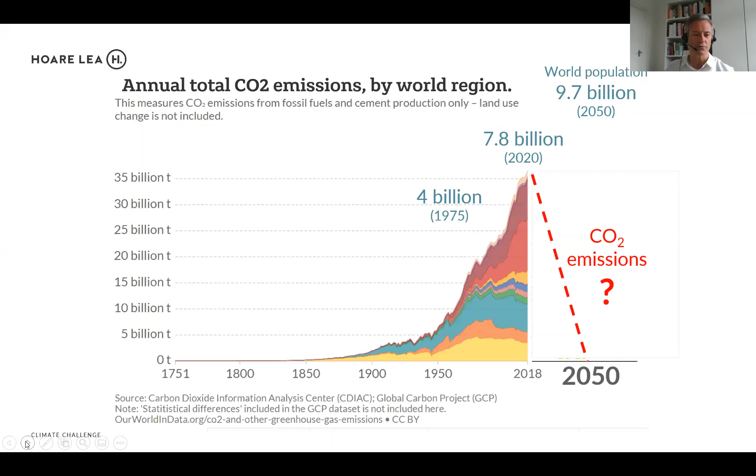There's a big market failure with climate change because the impacts of climate change are not faced by those responsible for the activity, partly because the impacts are faced elsewhere, and because they will be an impact in the future. A big economic study commissioned by the British government several years ago said that the cost of inaction will be overwhelming.

So as engineers, as designers, we need to demonstrate leadership, working with the whole project team, working with architects, working with clients to advocate a path to net zero, accelerating the shift to low energy buildings, sharing knowledge as Ian articulated. Definitely that sharing of knowledge is a key feature of achieving better outcomes. And a focus on performance outcomes. So it's making sure that what we design is delivered in practice.

So we have legislation as well. The UK was the first country to declare net zero territorial emissions. So that doesn't include imports, but how we operate as a country. Now that's 30 years off, and we clearly need to do something before that. And this is why there's a lot of effort on projects to get to net zero much quicker, at least in new development where we can, but also existing stock.

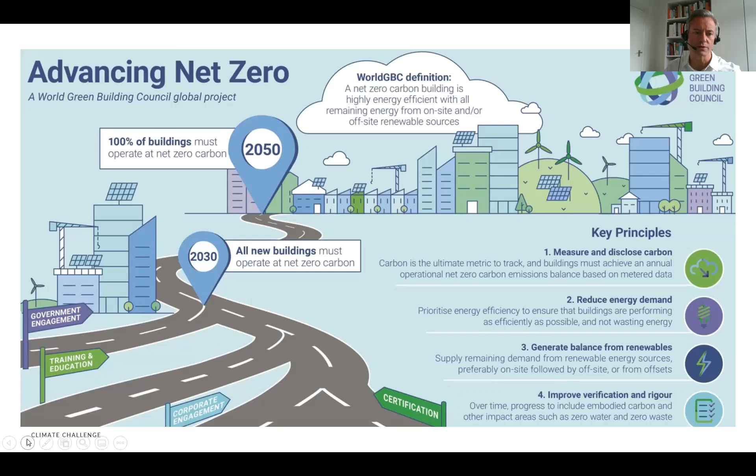And that's the new build focus, but also we need to deal with existing stock. So by decarbonising electricity generation, we can also improve how existing buildings perform and look at retrofit and refurbishment as well, which is a massive challenge, but an opportunity for the supply chain to get involved.

So it's always worth clarifying what we mean within the scope of net zero carbon. So the UK Green Building Council published a framework on this, and it defines operational carbon as the energy in use and the inclusion of any renewables, and the embodied carbon, which Ian spoke about, that's the pollution that comes from the construction process and replacement and refurbishment. And when you look at the whole of that, that's the whole life carbon.

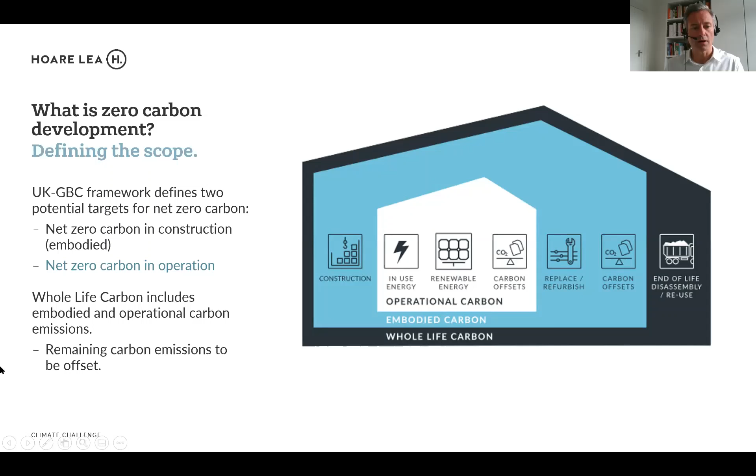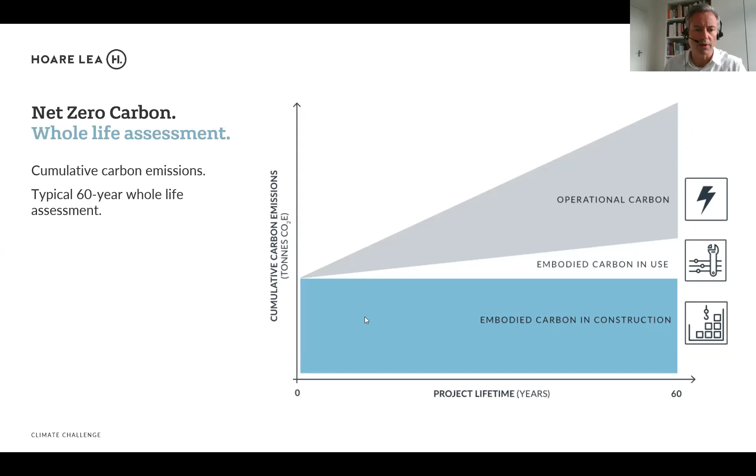So this is a typical analysis of building over 60 years. So approximately half of the whole life carbon starts from day one of occupation, because that's embodied in construction. So this will look different for different building types. It will look slightly different for schools, for homes, for a research building. But generally you get this pattern of the operational carbon increasing and the embodied carbon in use being replacement of parts. So we want to tackle all those elements.

And here's a breakdown of embodied carbon, showing on the left-hand side the substructure and the superstructure, really dominant there on embodied carbon, and that's largely as a result of concrete and steel in construction. And the more you can do to reuse a structure, obviously the more avoided carbon emissions there are, and then other components like the envelope and the building services themselves have an embodied carbon element.

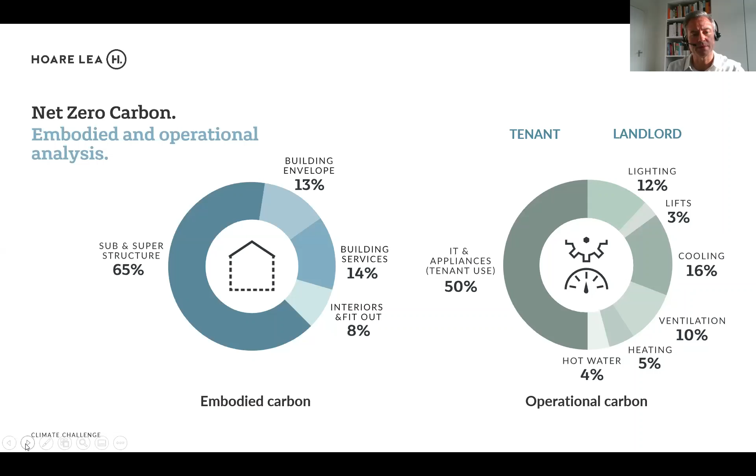And then on the right hand side, this is analysis for an office. So the tenant in an office is responsible for about half with IT and appliances, and then the landlord systems, such as the lighting and the ventilation systems, are also responsible for about half of operational carbon. So that provides an overview of all the things we've got to tackle to reduce carbon emissions in the built environment. At the same time, we have to deal with adapting to a different climate.

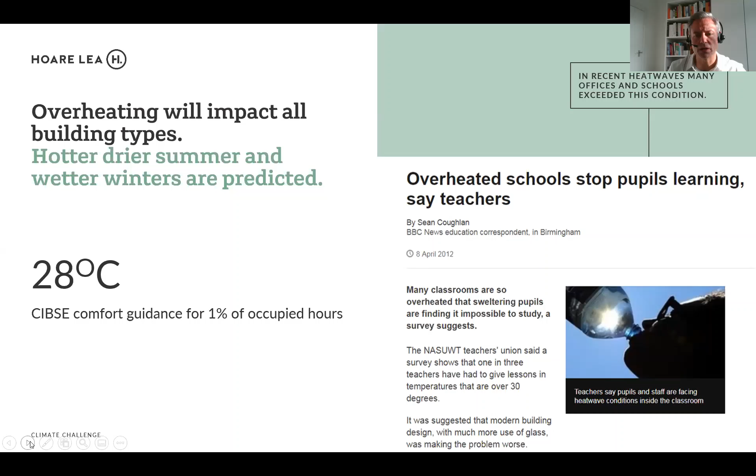So not only are we aiming to target more efficient buildings, we've got to deal with potential overheating, more flooding and design buildings to accept that. So a big challenge in building design is how do we design to avoid overheating and more heat waves without the need for air conditioning. So it would be a simple response to say put more air conditioning in, but that is an energy load. So we need to look at passive means, alternative means to achieve comfort, and we're seeing lots of implications in schools, for example, in apartments where there's just challenges for removing the heat gains.

Now, what about the commercial implications? So there's an estimate from the Committee on Climate Change that a net zero commitment could be met by an annual resource cost of 1 to 2% of GDP. This was announced before the current situations that internationally we're dealing with. I mean, for a comparison, that's less than what an industrial nation might spend on defence, blown out of proportion by what we're dealing now with COVID impacts on the economy. So in the scheme of things, 1 to 2% of GDP did seem like an affordable contribution to be net zero.

We find as consultants working with property developers and public bodies, it's really important to understand the business case. What drives the funder of a project to consider net zero, because many clients are not considering net zero. So we think it's important to demonstrate the co-benefits of getting to net zero and climate conscious design. So we often talk about the government drivers. So we've signed up to the Paris protocol to limit climate change. There will be regulation changes. The government's reviewing planning. So we talk to investors about being resilient, so that the investment in a property is future-proofed.

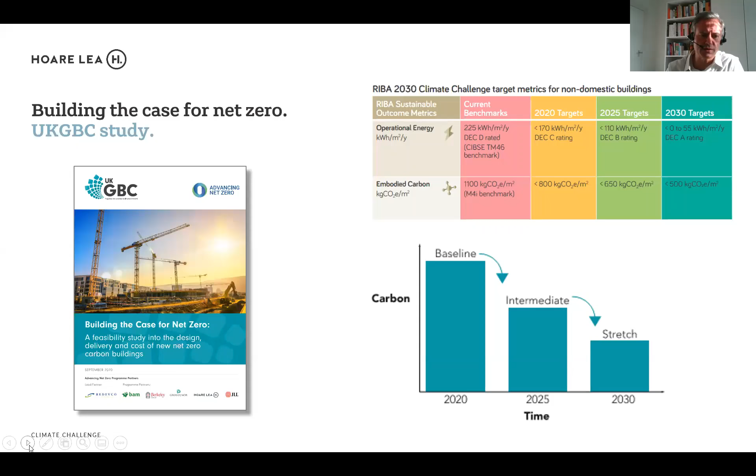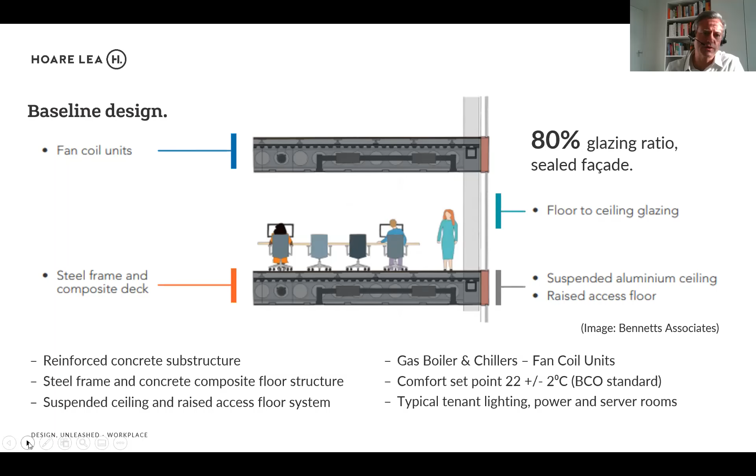If we go to the stretch target of this RIBA 2030 challenge, we will tend to find that there'll be less glazing because that will limit heat gain and heat loss, probably more solar shading, remove some of the materials such as suspended ceilings, go away from gas heating to heat pumps, so that's a lower carbon heat source.

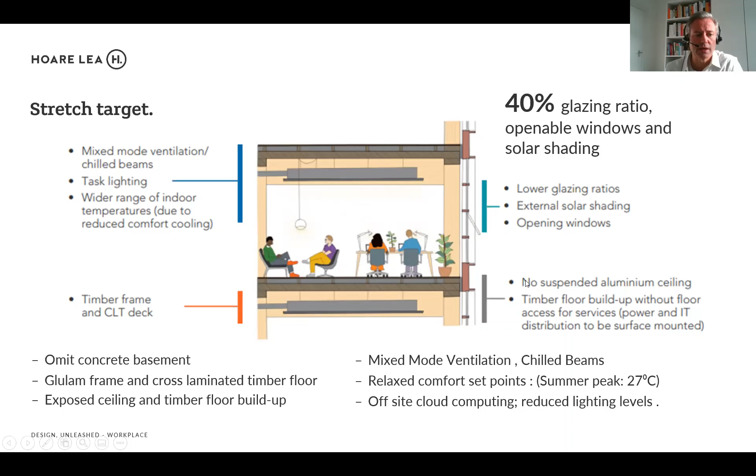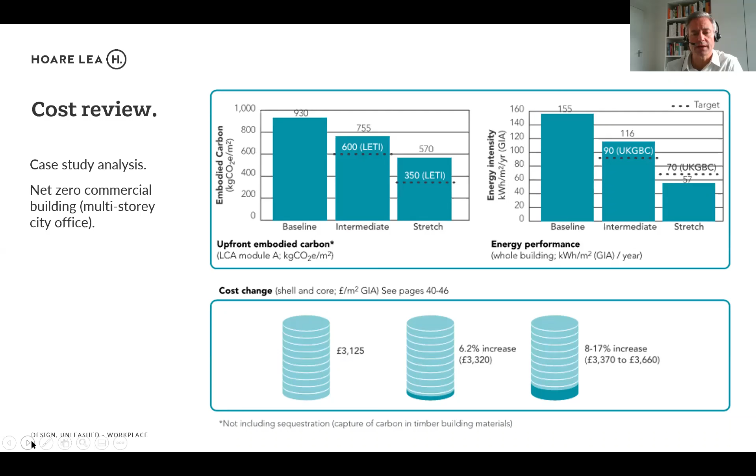And as part of a study with the Green Building Council, we evaluated with cost consultants the cost impact of that. There is a capital cost increase, so to get to that 2030 net zero target, at least for a commercial building, there could be a capital cost increase of more than 8%. But I think as the supply chain gets better informed and can do it more efficiently, we might see the capital costs come down. So I think it's important to recognise the reality that more work has to be done on getting the costs down. So very much, as Ian says, we need to focus on working together and look at the interdisciplinary nature of building design.

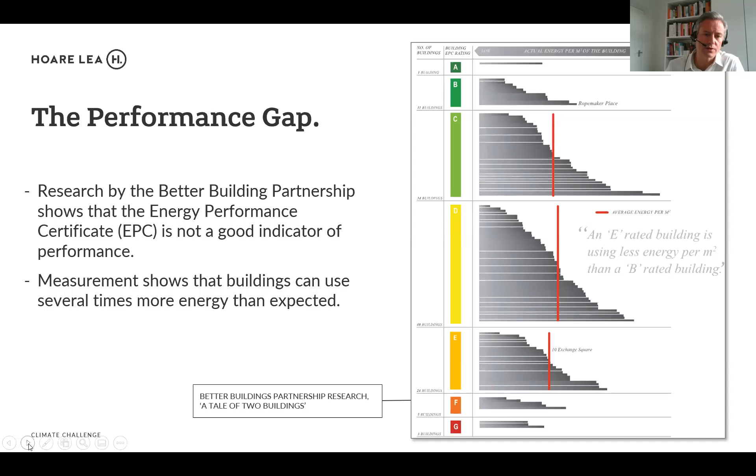The performance gap still exists. Here's a comparison of energy use from a range of offices where we have the energy ratings, which is the energy performance certificate. That's a theoretical rating, and each of the grey lines here represents measured energy. So you can see for example, a C-rated office, there's a big diversity in energy use, and for an E-rated office, there's also a big range of energy use there. So there are massive performance gaps, and measured energy is very different from the theoretical energy. So the design for performance strategy, which emphasizes this need to validate outcomes, is very important.

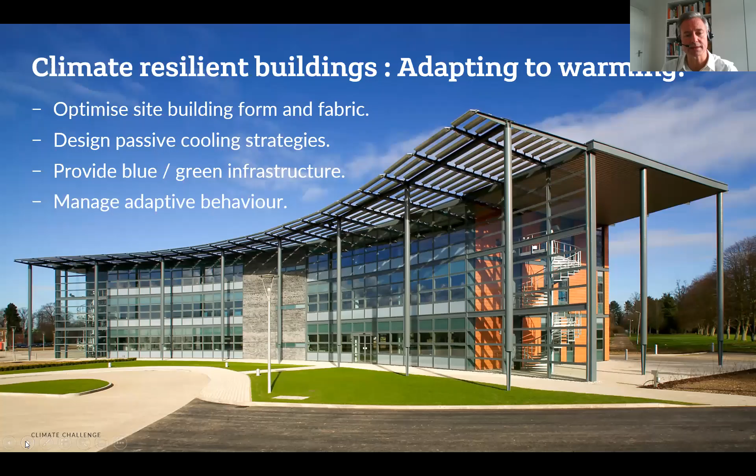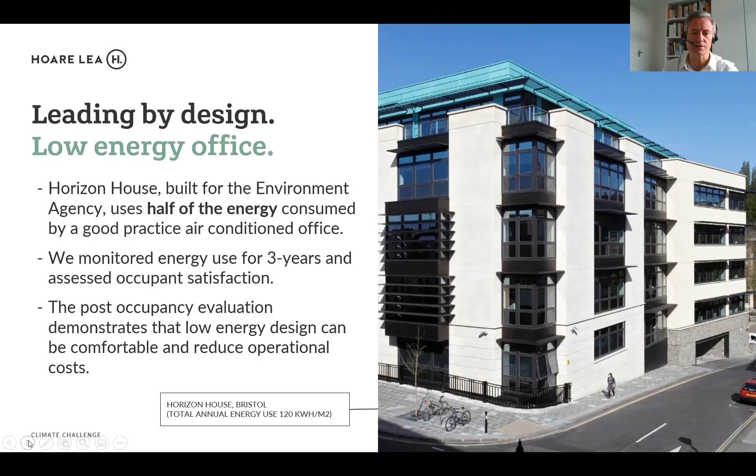And what we'll find is more early analysis on projects, looking at the building form and fabric, and passive strategies, blue-green infrastructure. That means looking at the landscape and surrounding of buildings so we can optimize the climate. Here's an example of a building we did for the Environment Agency, which halved the energy consumption compared to a good practice air conditioned office, simply by having shading, better controls, a ground source heat exchange system.

And looking at the bigger picture, with the decarbonisation of the grid and moving towards electric vehicles, we can see that the whole infrastructure really should work in this electric future of electric transport and electric buildings. So just to finish off on embodied carbon, massive global impact coming from concrete and steel. Concrete and steel each responsible for about 7%, 8% of worldwide emissions.

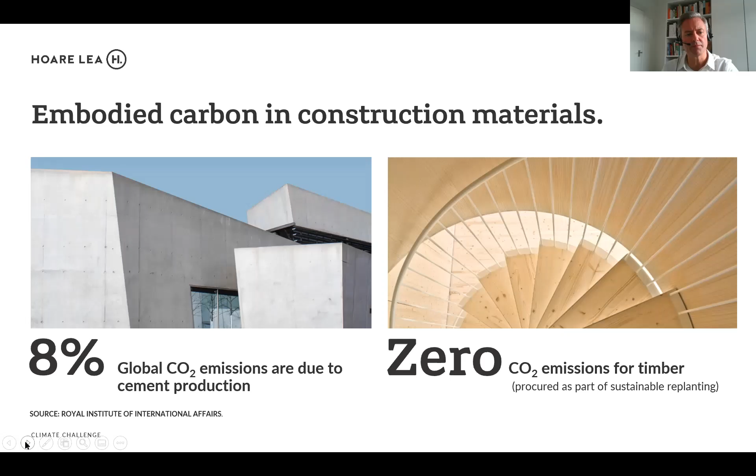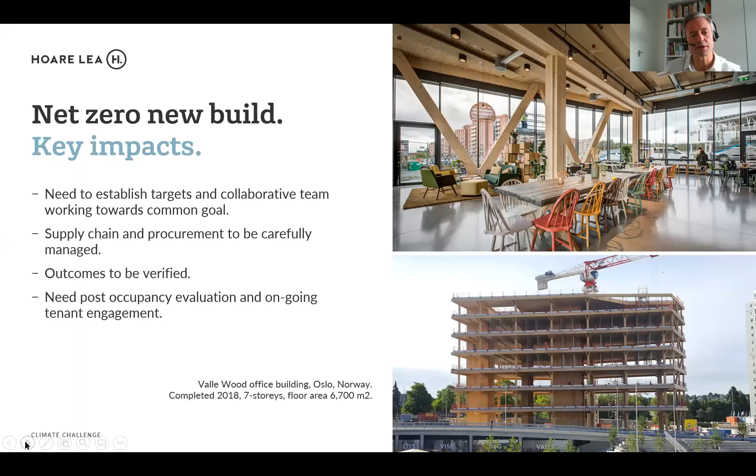So key lessons are use less, fewer finishes, exposed surfaces, robust materials, and impacts for the industry on how we perhaps define beauty, how we manage occupant expectations. Materials will be different, the management of the building will be different, and reinforcing the need to verify outcomes and post-occupancy evaluation, and just the feedback loop of measurement, verification, and continually improving design.